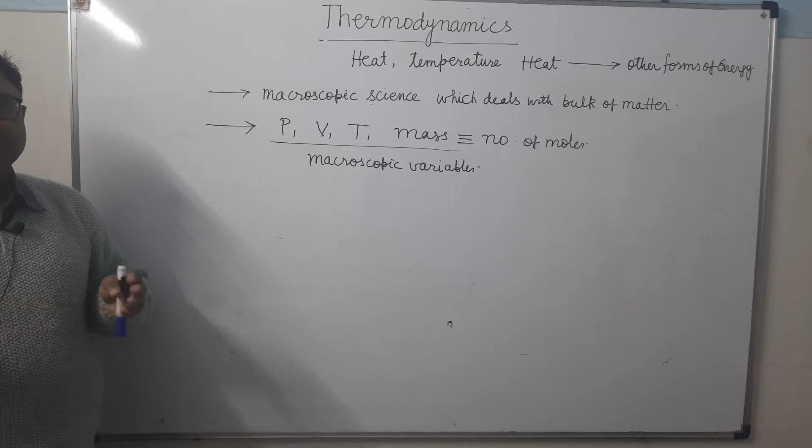So, what is thermodynamics? It is that branch of physics which deals with heat and temperature and its interconversion, meaning interconversion of heat into other forms of energy. Thermodynamics deals with the bulk of matter, which consists of an innumerable number of particles or molecules. Though it deals with innumerable particles or molecules, it is a macroscopic science. Here in thermodynamics, our approach of study is macroscopic. We don't go into the detail of the molecules. So it is a macroscopic science. A thermodynamical description is done on the basis of these variables, which we also call thermodynamical variables.

Now there are some terms before going actually into thermodynamics. One is system. System means it is that part of matter, that part of the system, or that part of the universe, of which the thermodynamical study is being done.

That part of matter whose thermodynamical study has to be done is called the system. And everything which is surrounding that system is called the surroundings.

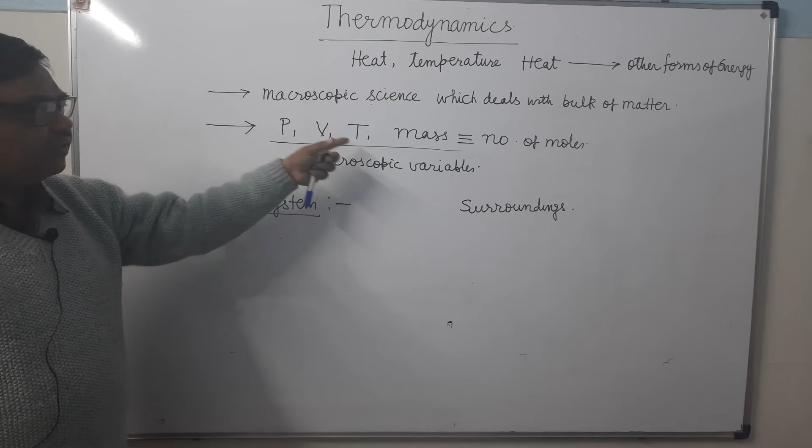Now what is system? System is that part of matter, that part of universe whose thermodynamical study is to be performed in terms of these variables. It's called the system. That system may be surrounded by real boundaries or it may be surrounded by virtual boundaries.

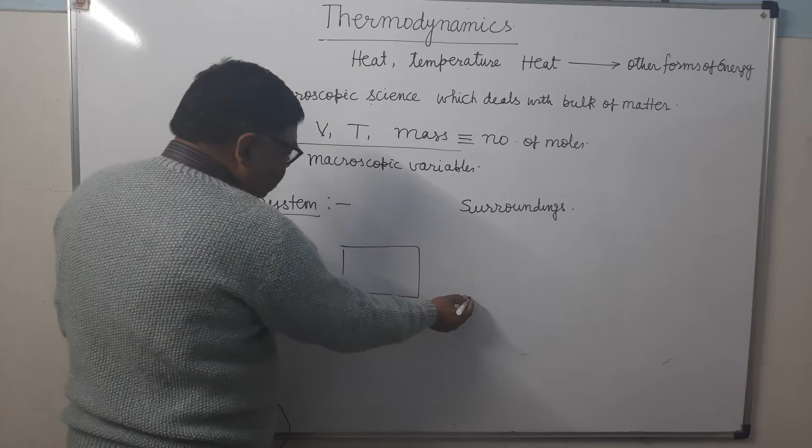For example, if you keep a book here, it is not surrounded by any real boundary. Its surfaces are itself the boundaries.

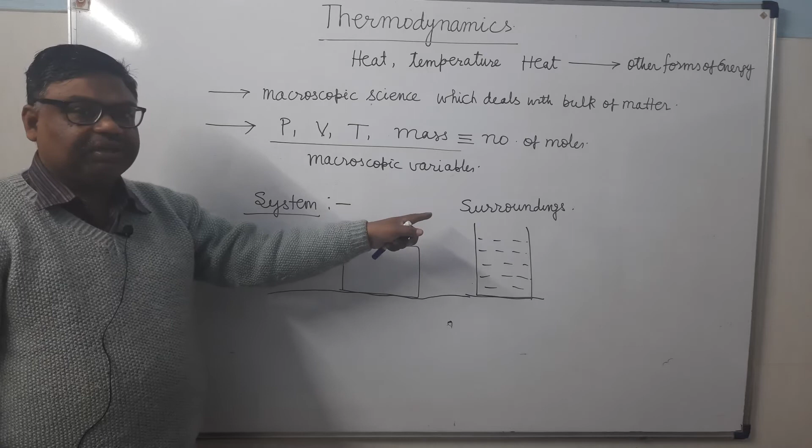And anything which is surrounding the system, which has a direct effect on the system, is called the surrounding. There may be exchange of heat between the system and surrounding. There may be exchange of matter between the system and surrounding. So there are three types of systems. One is the open system.

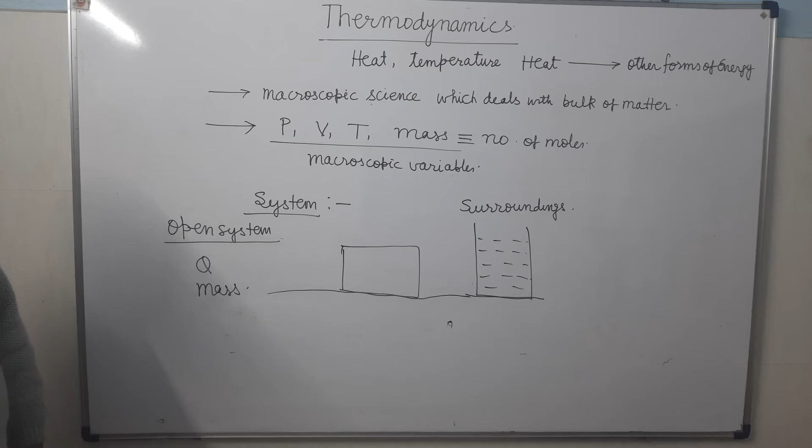exchange in between system and surrounding. That is called the open system. Now for example, here this is a cup which is having hot tea. So there may be exchange of heat energy, means heat energy may flow from system to the surrounding or surrounding to the system, as well as there may be exchange of matter also. This kind of systems are called the open system.

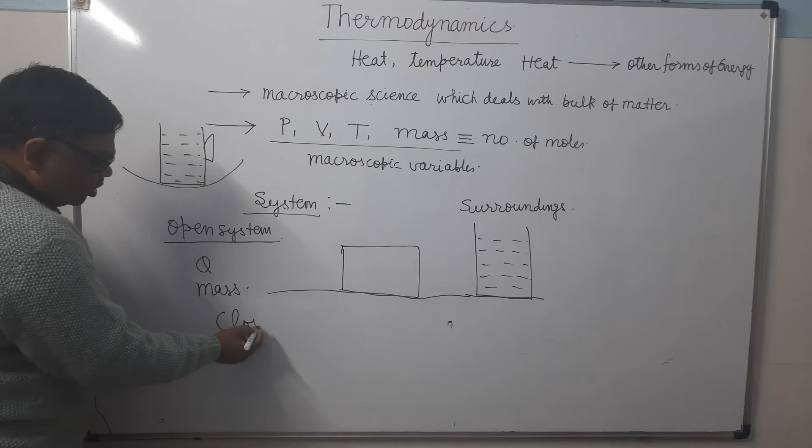Then there is a closed system. Closed system is one in which there is exchange of heat energy, but there is no exchange of matter. Means we have covered it with a plate. There is no exchange of matter, but there may be exchange of heat, depending upon these walls. If these walls are conducting, then there will be exchange of heat very easily.

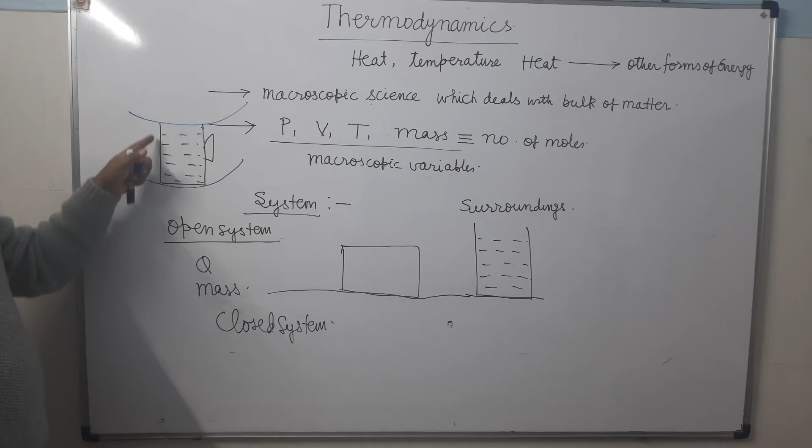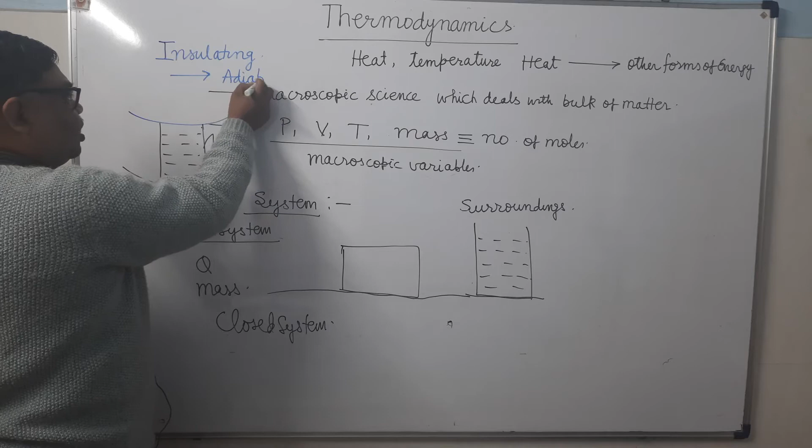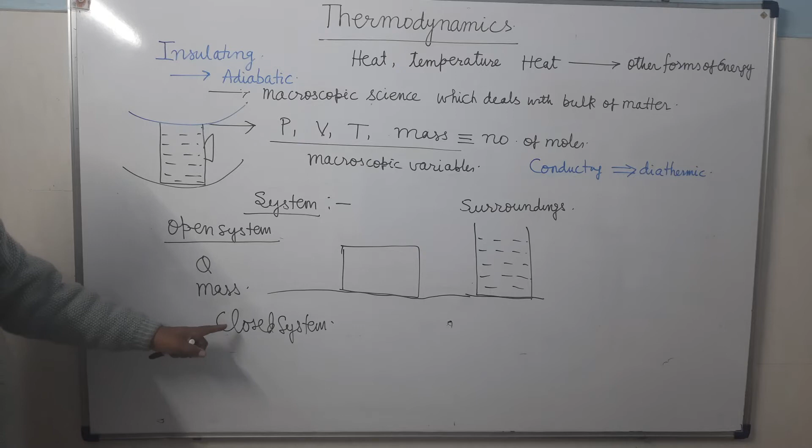But if these walls are not conducting, suppose insulating walls, means adiabatic walls. When we say insulating, in thermodynamics it means adiabatic. Adiabatic walls do not allow the exchange of heat energy between system and surrounding. And conducting means diathermic. These terms are very important to study thermodynamics. So if there are diathermic walls, there will be exchange of heat. In that case, this system will be the closed system, because Q is exchanging but mass is not exchanging.

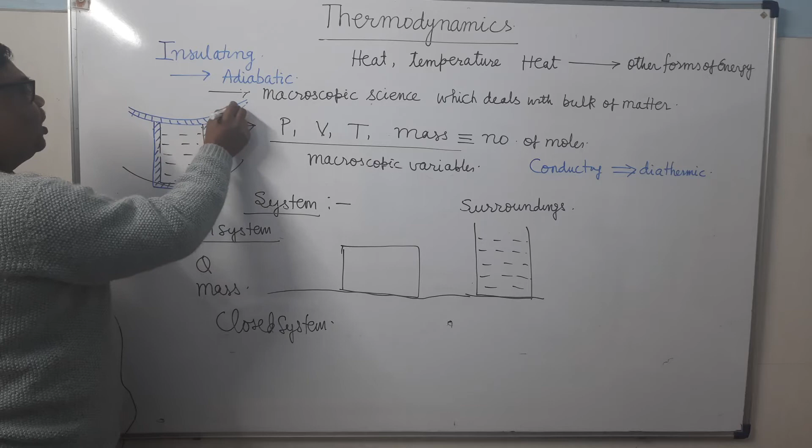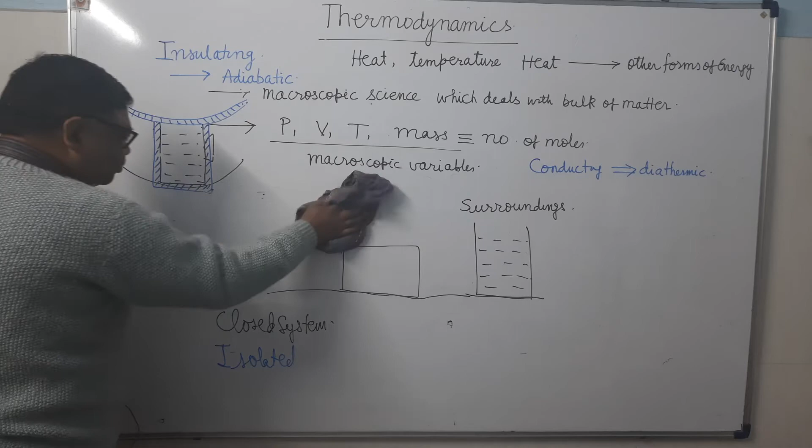For example, thermos flask. Then neither there will be any exchange of heat, nor any exchange of matter. That type of system is called the isolated system. Isolated system means in which there is no exchange of heat or matter. So a system can be of three types. Now see here, there are some more terms.

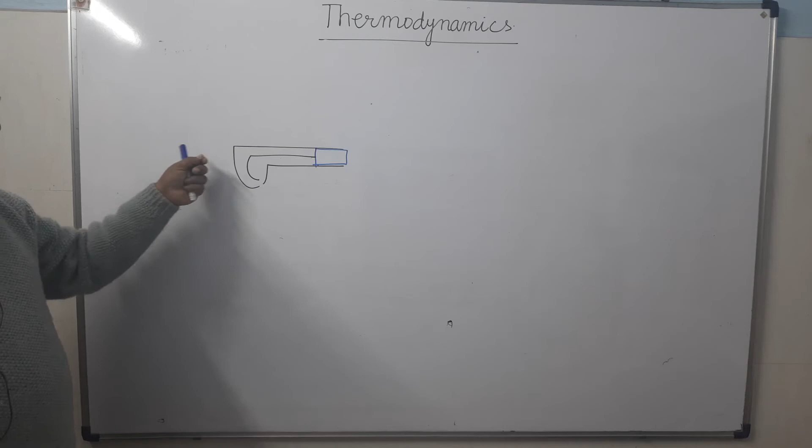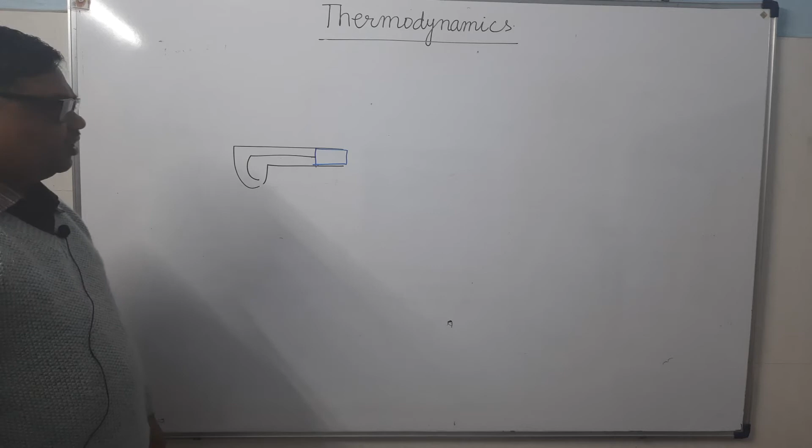So what is thermodynamics? Thermodynamics is that branch of physics which deals with heat and temperature and interconversion of heat into other forms of energy. I am going to give one very good example. This is a gun, and here this is a bullet. When you pull this rod and release it, the bullet will move forward. When you fire with the help of this gun, this bullet will move forward.

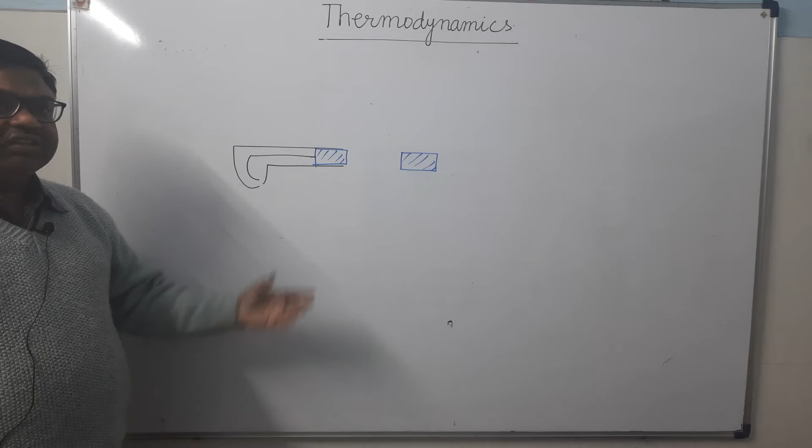Is there any involvement of thermodynamics? No, there is no involvement of thermodynamics. Only the mechanical state of bullet has changed. क्या हुआ है? केवल बुलेट की मैकेनिकल स्टेट में चेंज हुआ है. Initially it was at rest, now it is moving with a definite velocity. But when it collides with a wooden target, what will happen?

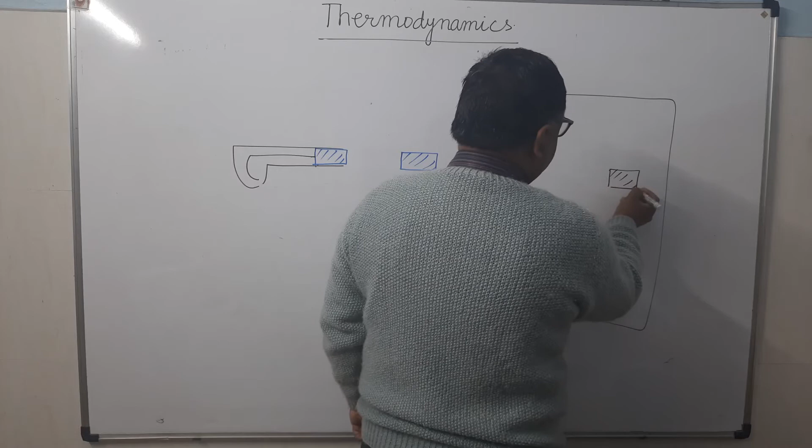It will collide with the wooden target, pierce inside it and come to rest. Now what will happen? You will find that there will be a change in the temperature of the bullet. There will be a change in the temperature of the layers of wood which have come in contact with the bullet.

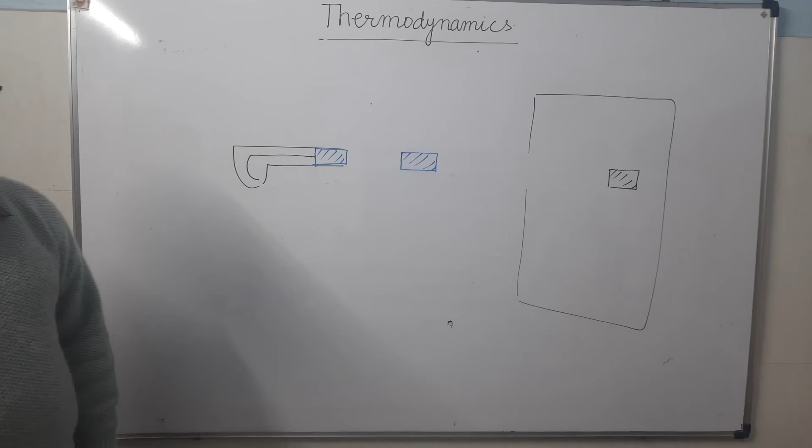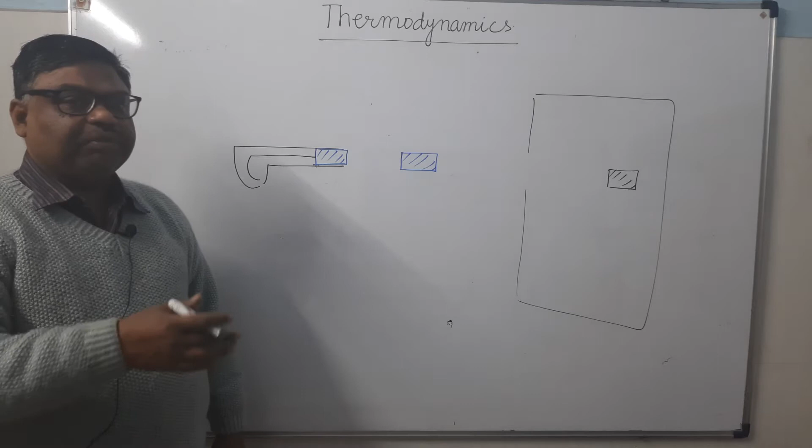So now here there is the involvement of thermodynamics. Because of the mechanical state of the bullet, the temperature has changed. Its mechanical energy, which is kinetic, has changed into heat energy. So at this point, thermodynamics is involved. As long as it had not collided, it was purely mechanics. But after colliding, thermodynamics has come into existence. It's clear? So this is thermodynamics.

About the thermodynamic system, I have already told you the thermodynamic variables: P, V, T and amount of substance, which we express in number of moles. Then there is the equation of state. What is the equation of state? It is expressed in terms of the thermodynamical variables, meaning the thermodynamical description can be described in terms of these measurable quantities which we call thermodynamical variables.

For example, in case of an ideal gas, for 1 mole the relation is PV = RT. It is an equation of state. Suppose in any gas some change is taking place at constant temperature, we can express it by PV = constant. If the change is at constant pressure, we represent it by V/T = constant. So these are equations of state which represent the state of the gas, the state of the thermodynamical system.

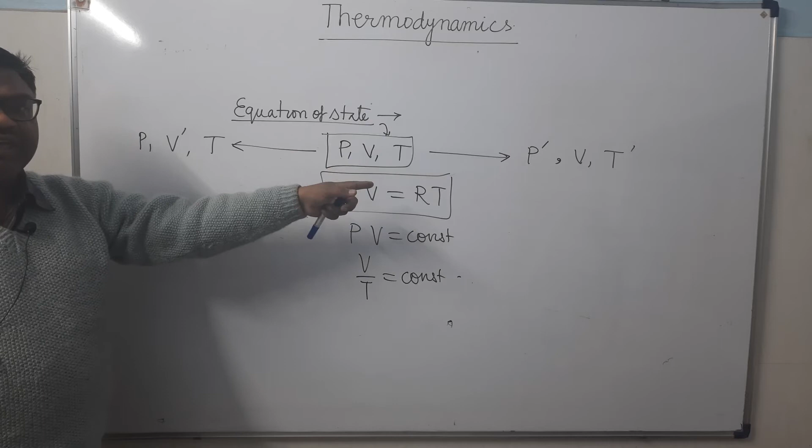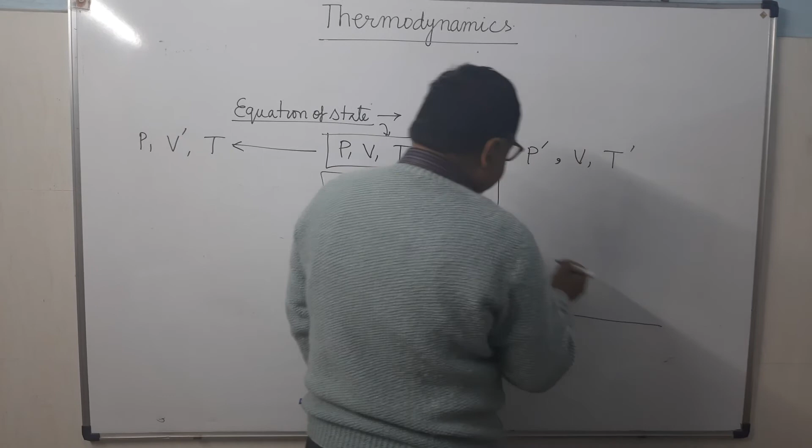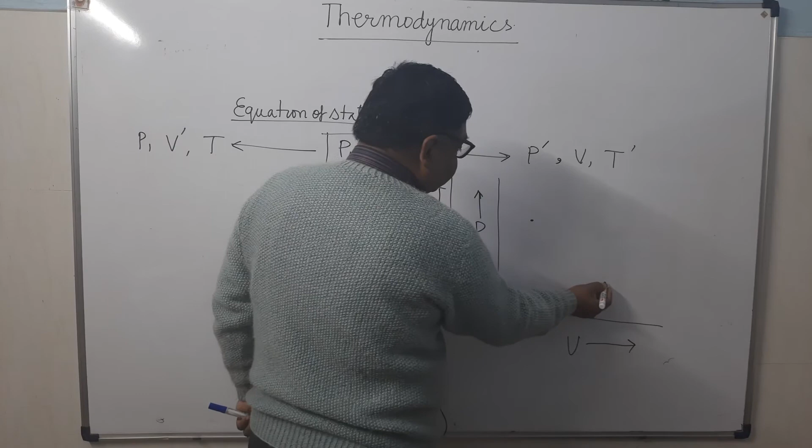Of the same system. So a system may pass through a number of states, and a definite value of PVT represents one state. These states can be represented on a PV curve which we call the indicator diagram. Every point on this graph represents a different state, because the pressure is varying, volume is varying, and temperature may also vary. If you change any one variable, the state will be changed.

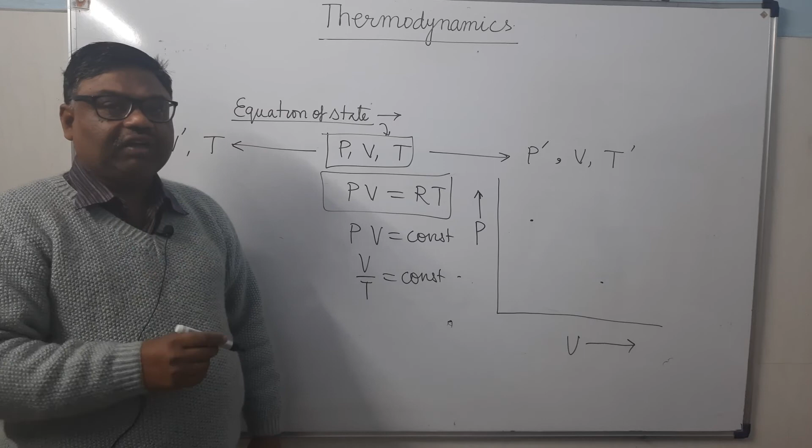For example, we have described the state in case of the bullet. As long as it was inside the gun, its mechanical state was at rest. And when it started moving, its mechanical state changed from rest to motion.

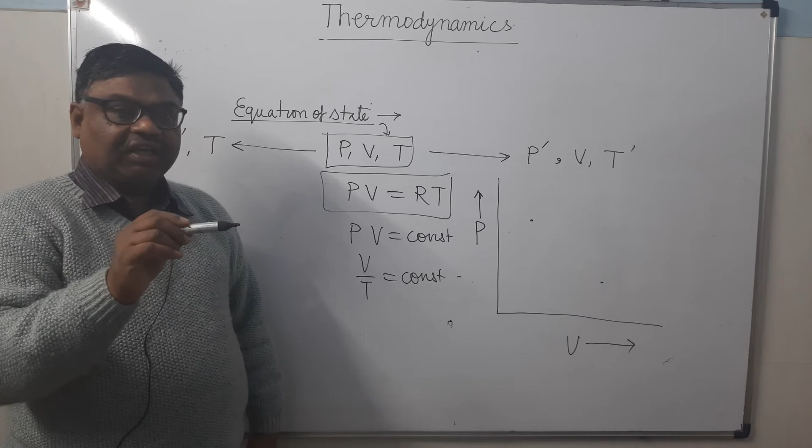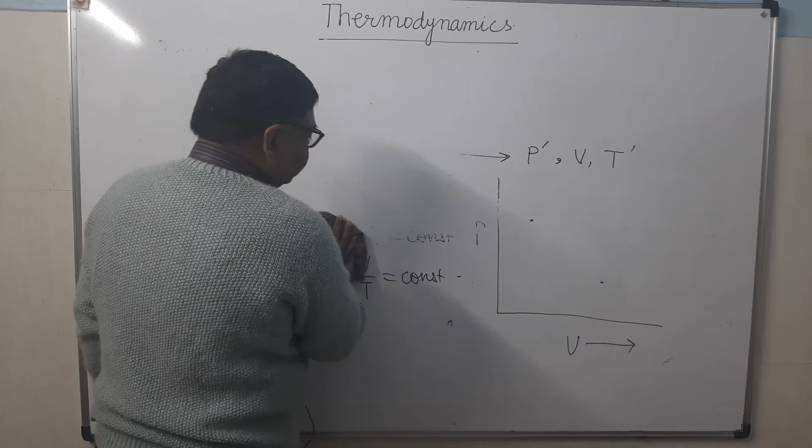It is clear? Now see here, after this there is one more term, thermodynamical equilibrium. What is thermodynamical equilibrium? If there is no change in pressure, volume, temperature, number of moles of a system with time,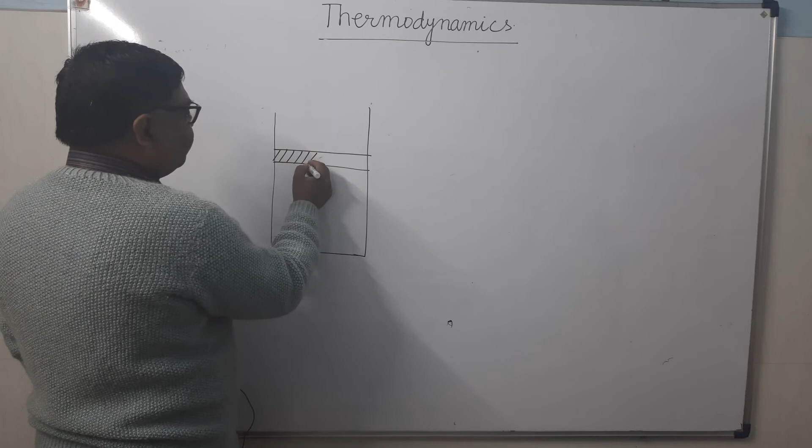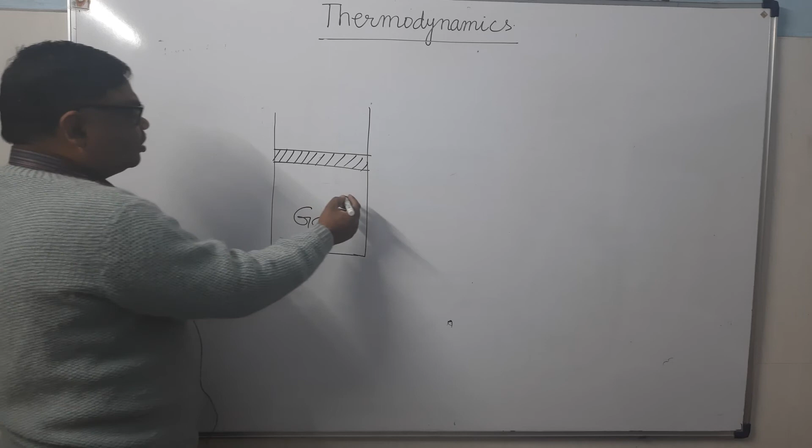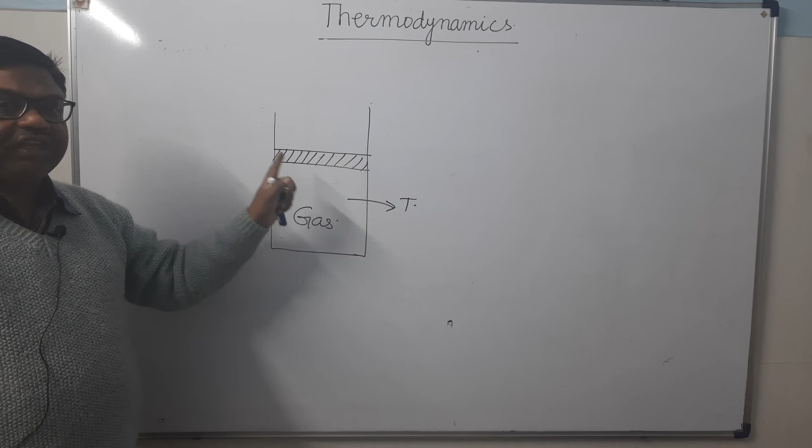Temperature is constant. Then when you change the volume, what will happen? The state of this gas will be changed. It's clear. This is a thermodynamical process in which the change is taking place in the state of the thermodynamic system. In this thermodynamical process, in which the state of the system is changing in such a way that the temperature remains constant, it's called the isothermal process.

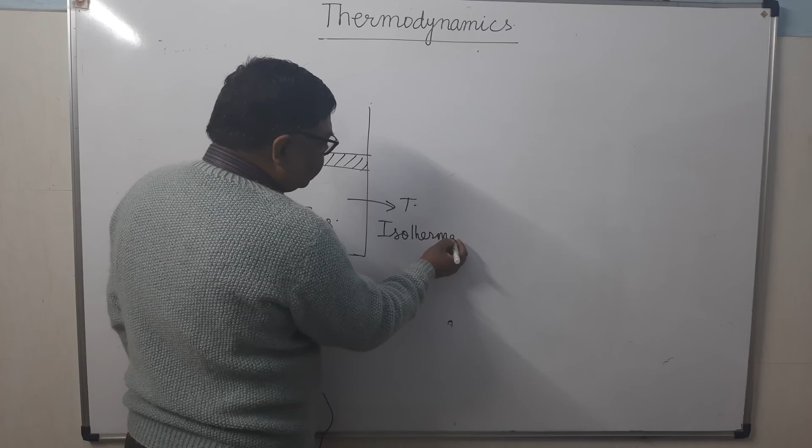Isothermal process. For example, the change is taking place in such a way that the pressure remains constant. For example, this gas is being heated in such a way that P remains constant. We say that this thermodynamical process is an isobaric process. For example, we change its thermodynamical state, and the thermodynamical state is described by which parameters?

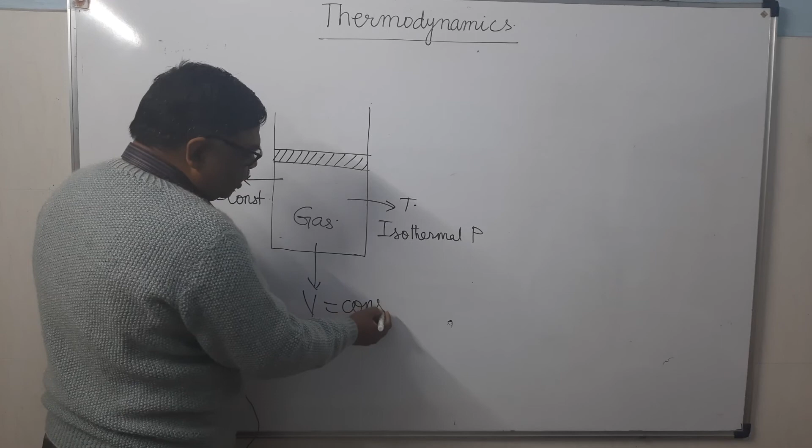P, V, T. We are changing the values of P and T, keeping V constant, so that the piston remains here only. It neither goes up nor goes down, but the pressure and temperature are changed. That is called the isochoric process.

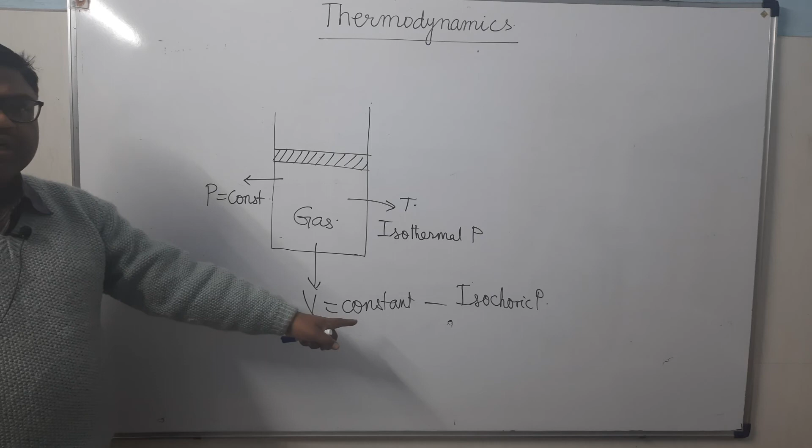What is a thermodynamical process? It is that way through which the change is taking place. It's called the thermodynamical process. There are different kinds of thermodynamical process. Isothermal: during the change, temperature will remain constant. Isochoric: during the change, volume will remain constant. During the change, pressure remains constant: it is called isobaric.

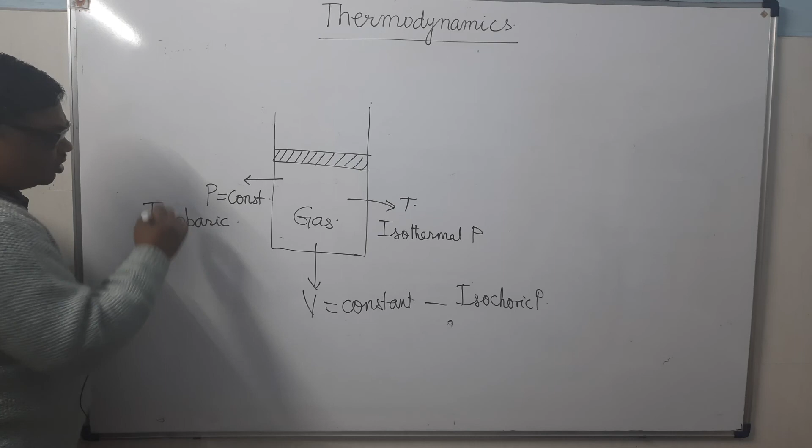Suppose the change is taking place in such a way that there is no exchange of heat between system and surrounding. That change is called the adiabatic change. There is no exchange of heat energy between system and surrounding. That we call the adiabatic process. About the isothermal process I have already told. The different processes I will explain in the next lecture.

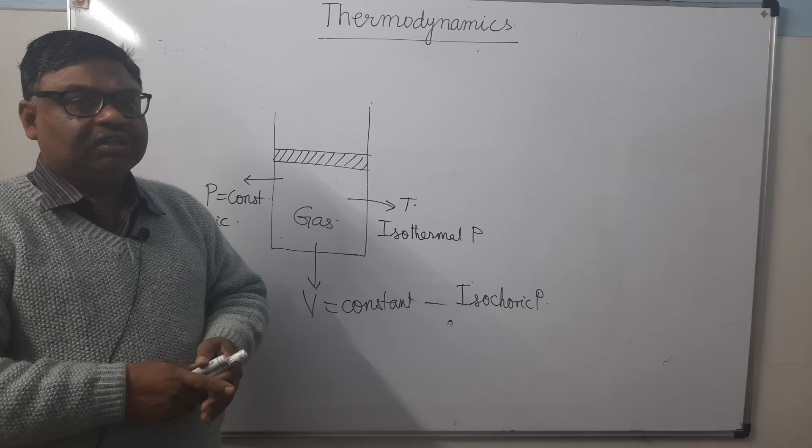So this is all about the introduction of thermodynamics. What is thermodynamics? It is that branch of physics which deals with heat and temperature and the interconversion of heat into other forms of energy. Thermodynamics is a macroscopic science; though it deals with the bulk of matter consisting of innumerable particles, we don't go into the molecular details, what are their velocities, what are their positions. We take the whole matter as a bulk. So this is a macroscopic science.

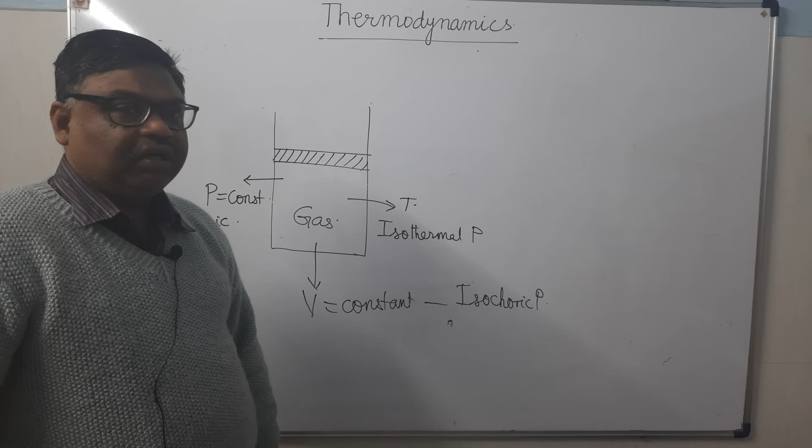A thermodynamical description of a system can be given by using some variables which can be felt by our sense perceptions very easily. These are pressure, volume and temperature. These are called the thermodynamical variables. Any relation connecting these variables is called the equation of state. These are the thermodynamical processes. I think it will be clear to you. In the next lecture, I will tell you about the zeroth law of thermodynamics.